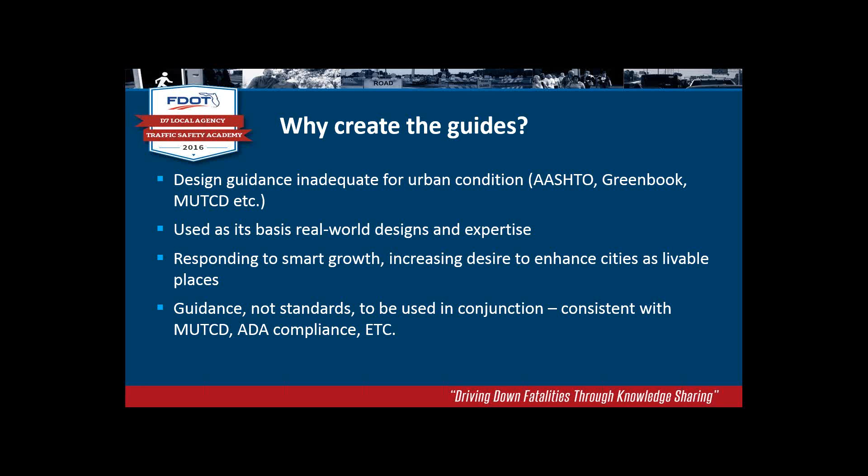They're consistent with MUTCD in most cases, ADA compliance, etc. Members span the whole country. There's also affiliate members and international members, really active everywhere from Vancouver to Miami, so you'll see influence from all over. They do workshops annually—I think the last one was in Seattle, and they held one in Phoenix. Those are really on-the-ground opportunities to look at how to apply some of these tenets.

So where does DOT stand? In 2011, it was sort of like, whoa, this guy's kind of out there, and I think they've come a long way. In 2013, there was a memorandum that kind of approved using these design guides in addition to using the AASHTO green book and the AASHTO bike guide.

Those were the two initially, and FHWA came out in support of a more flexible approach to bike and ped facility design, which is really moving things forward. That same memorandum affirmed them as primary national resources. So again, it wasn't an or, it's an and—you can use these resources by all means. They don't take precedence, but they can be used in conjunction.

In 2014, the Street Design Guide came out, and they basically said the same thing, that these are good resources to use in conjunction with other resources out there. The Urban Street Design Guide is actually listed in the FAST Act as appropriate for design. I was looking at the PPM Chapter 8 for FDOT yesterday, and they reference the Urban Street Design Guide as well as the Bikeway Design Guide too. So these are legit guides. They hadn't really been before—there was a lot of fighting about it, but they've come into the mainstream now and can be used for guidance.

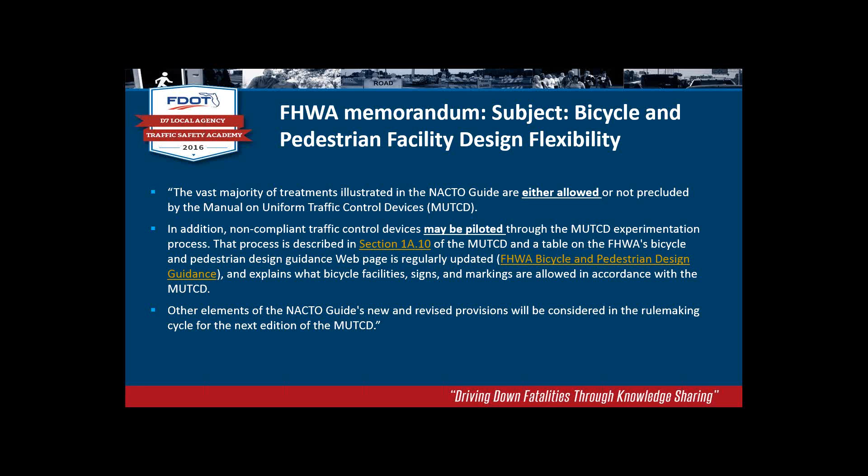To further that point, at the time, because they were kind of out there, NACTO made a point of saying that everything is either allowed by the MUTCD or at least not precluded—things like bike signal heads by experimentation are allowed. They weren't doing anything totally radical, just putting it together in a new package. And it turns out updates to the MUTCD will take NACTO into account. One issue NACTO had with MUTCD before was the length of time it takes to update and get new ideas out there. Well, now it turns out MUTCD will piggyback on the work that's been done.

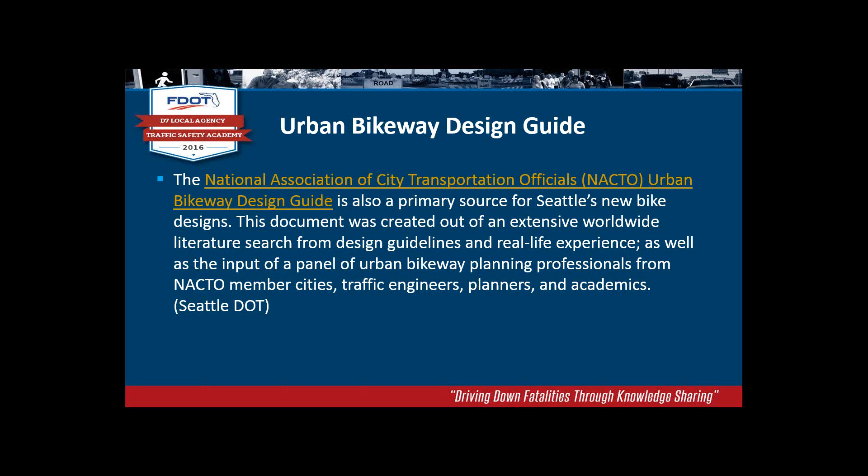So Seattle went full bore using the Bikeway Design Guide as their primary source. The AASHTO Bike Guide hadn't been updated in forever, so SDOT is one of a number of city transportation departments that uses these guides as their primary resource.

So what are they? They're design guides, idea generators in a lot of cases, because they pull together so much from so many places that if you're looking for creative ways to handle your streets, to make them more livable, these guides present those opportunities, those case studies, in a highly graphic manner that gives you things to think about and guidance about how to get it done.

When to use them? Street infrastructure involves complex situations, individual responses to context and engineering judgments, so these guides do not lay out the specifics necessarily. These are thinking guides. They don't assume you're going to open it up and see the answer to your street. This gives you ways to think about how to fit things in, things you might not have thought about.

Each of these guides did a tiering approach to their levels of guidance, identifying things like critical features. When I say strong consensus of absolute necessity, when they were coming up with these designs, they reviewed them with different cities, and what's critical are things that everyone they talked to or looked at these designs decided were absolutely necessary.

Recommended features may add value but may not be appropriate in every circumstance, and then there are optional features. Cities handle things in different ways - everybody is different, every street is different - so they also present options you might be able to apply in some places and not others. It's definitely not one-size-fits-all, except start with the critical and work out from there.

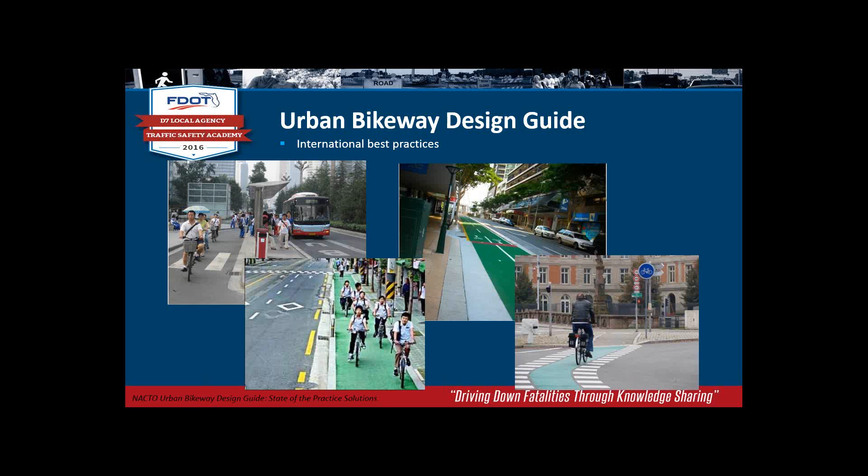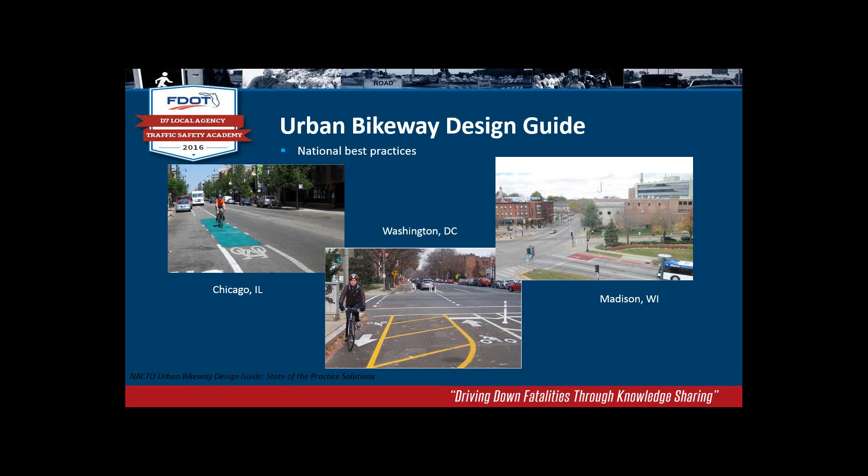I talk about how this whole thing got started. It turns out internationally there's a lot of good work going on, and the feeling was that what was going on stateside wasn't good enough. It didn't give us the street environments, the urban environments we really wanted to create. Turns out there was some national work being done too that was really good - Chicago, DC, Madison, Philadelphia, New York, pretty much everywhere were doing things that were way beyond what the AASHTO Bike Guide or the PED Guide were calling for.

So the Bikeway Design Guide covers 5 topics: primarily bike lanes, cycle tracks, intersections, signals, signs and markings - I'm not going to go through all of them. Again, I highly recommend you just open up your browser and pop through each of these. I'm going to show you how the books look, how they break down, and why they're pretty groundbreaking as far as the resource goes.

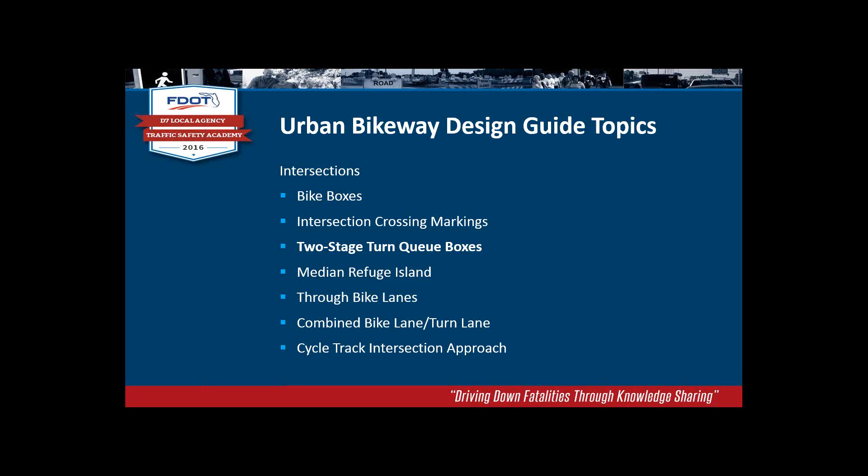Within that intersection section: bike boxes, crossing markings, two-stage queue boxes, median refuge islands, through bike lanes, combined bike turn lanes, and cycle track intersection approaches. They've thought through every aspect of intersection design as it relates to bikeway design. Every section starts with an introduction - what it is, how to use it, a reference to perhaps international best practice, and then conflicts, things to think about.

Where the guides get maybe a little more helpful than some of the existing guides, like the AASHTO guides, there's benefits to thinking about why you'd ever want to put this in. In this case, the two-stage queue box is about visibility and comfort, and then where to apply. Typical applications show up in each of those sections I talked about before, so you know when to think about using it if you didn't know.

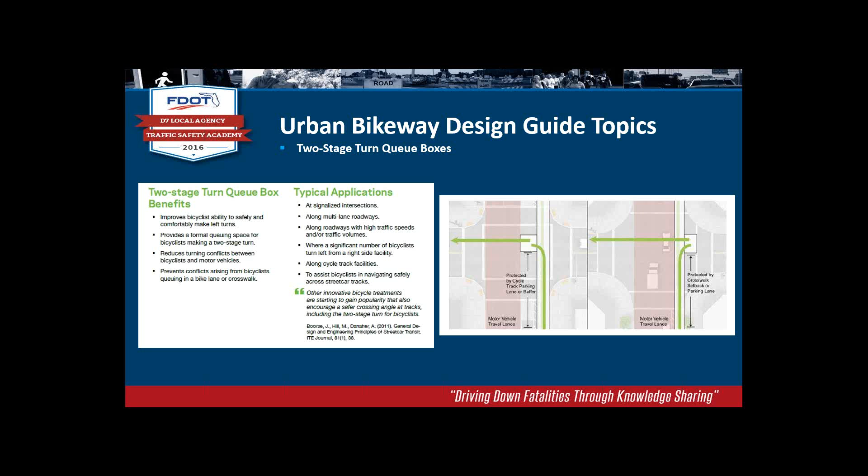On the right is a graphic, and I think these guides were on the forefront of this. It's much more mainstream now, but at the time you didn't get this kind of graphic. This shows two places where the two-stage queue box could be helpful, ahead or behind the cycle track. You get more in-depth drawings, available for all of them, and this is where you get into what the MUTCD says, placement of the queue box itself, markings across intersections. By looking at this, you get a sense of what the street would look like with it, since there are two options presented with two graphics.

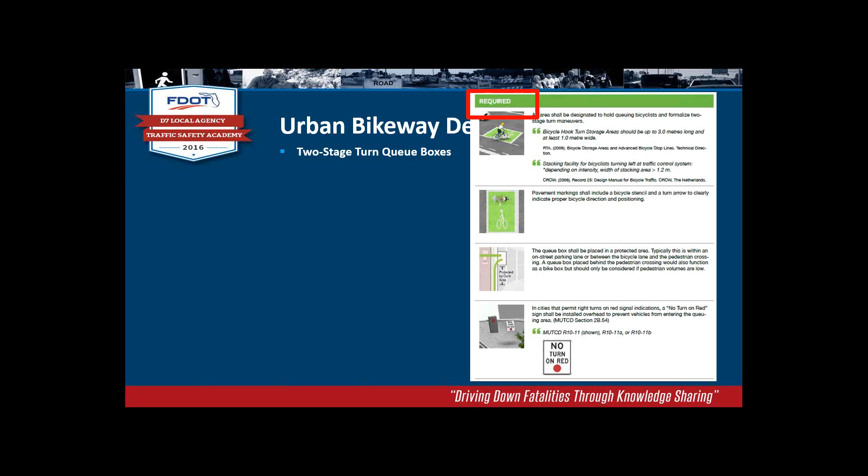They do a required and an optional section, like I mentioned. This shows up for everything, so these are the required things when you're putting in a two-stage queue box, all the way from where it is, the size of it, to the MUTCD requirements. The recommended section covers things that have been commented on and learned from other cities, and then optional things that might apply or might not. It just gives you, if you read through them all, a sense of what applies to your situation.

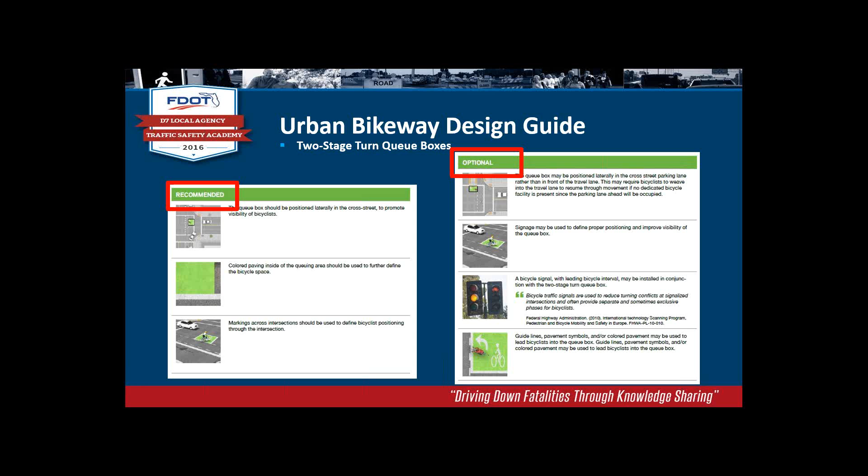They talk about maintenance, which comes up in most infrastructure design. This puts it front and center as things to think about.

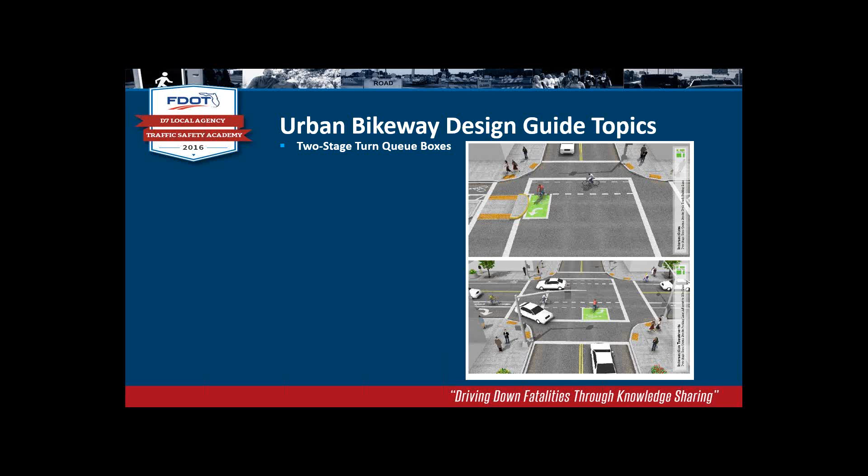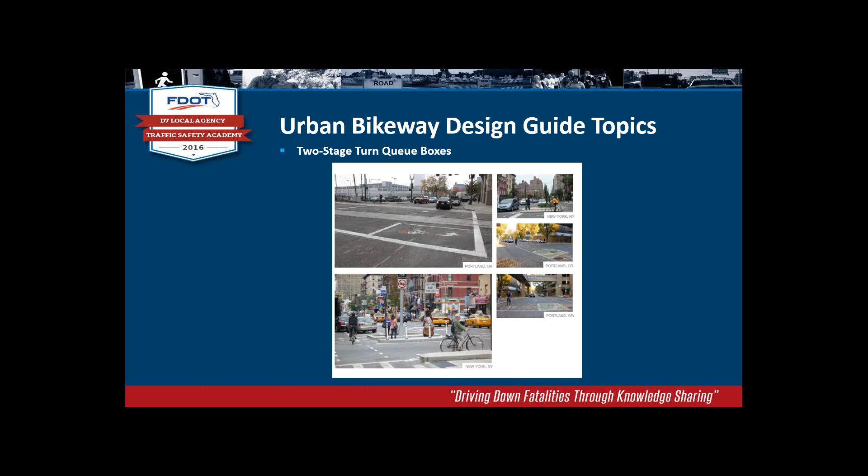And then treatment adoption and professional consensus, places that are using them. It's always really helpful to see what's on the ground, maybe make contact with folks who are doing it, and in this case it gives it a credibility. It helps you know what direction to take if you've got something specific you want to check in with them about. They're heavy on the graphics too, so this is a 3D rendering of what it would look like in practice, and then pictures, which are also helpful to see what it ends up looking like on the ground. That's the structure of all the chapters, everything from the finest points of what to think about to what it looks like in practice, so you can really understand how any of these treatments work.

They talk about bike lanes. We're seeing more and more of these. At the time it was kind of cutting edge, less so now. Buffered bike lanes are pretty standard. Contraflow, less so, but again these topics are discussed.

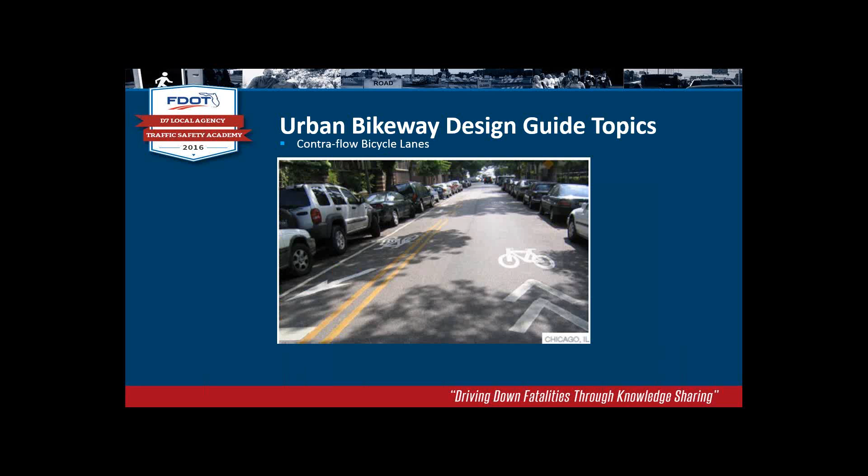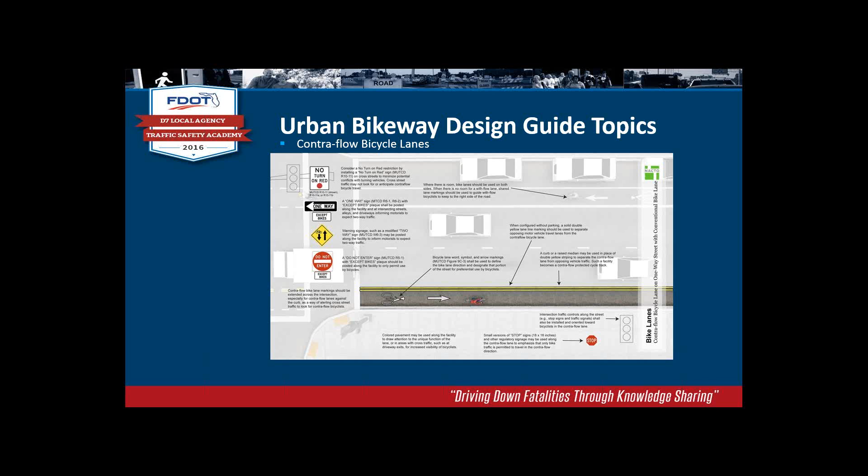I want to just tell you what's in the book, so if these apply to you, you know where to go, or at least where to start looking at this stuff. The same kinds of graphics are available, so this is that contraflow bike lane, showing which MUTCD signage to use, where to place things, issues to consider. Highly graphic-based, so if you're reading a paragraph and it's not making sense, you've got this page to show the layout and the pictures and whatnot.

Left side bike lanes are a little bit less common. In these cases there may be situations where you just don't know what to do, you want to do something, and these guides may help you figure out what's possible. They've got the same kind of graphic guidance, so if you need to explain it to someone, it's really easy to do.

Cycle tracks, of course, all the rage right now here in Tampa. We're really happy about our newest and latest one that opened, but there's a variety of them. You've got the one-way protected, you've got the raised, and you've got the two-way. All of them are applicable in different situations and have different design challenges.

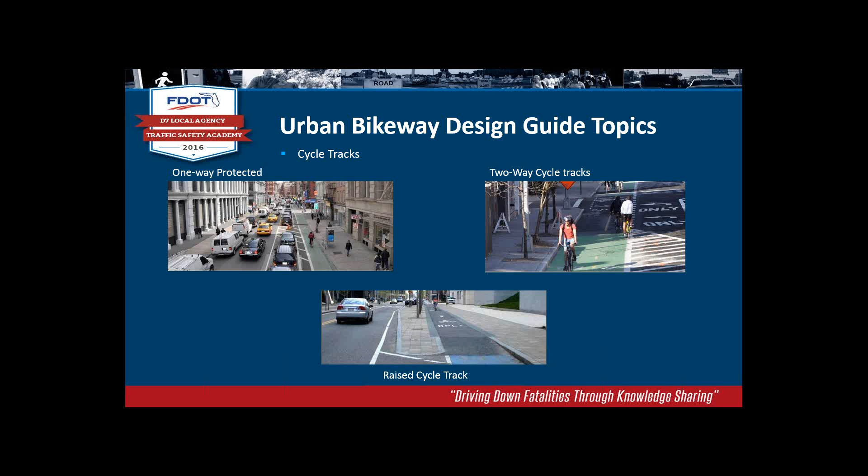At the time there really weren't many being done, and so what NACTO did, I made reference to the international focus the first time round, a lot of these treatments are on the ground in Europe and have been for a very long time. The U.S. is just a little bit behind in applying them. So when they didn't have the data to back up the why to do it here stateside, they went abroad. This is an example: some of this data on width based on intensity is based on either a European resource or a resource from the Netherlands. Again, it just gives it credibility.

It's less of an issue now because we've got a lot of U.S. data to back up the success of these, but at the time it was really what made this guide a valuable resource.

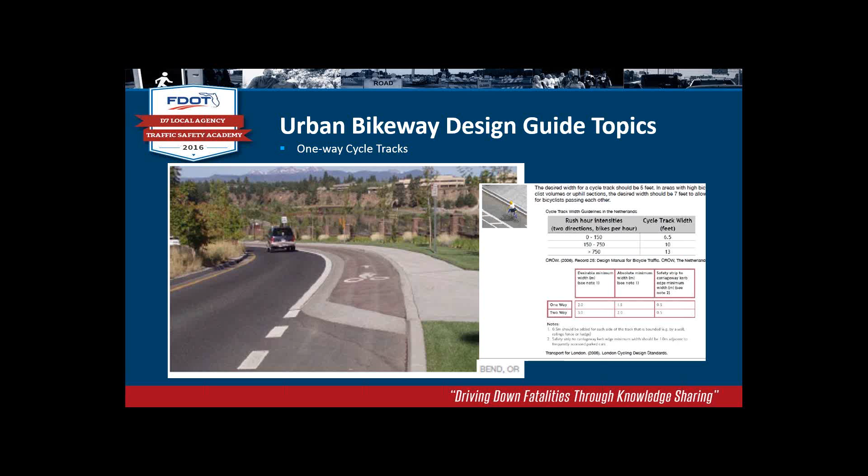And then again, more graphics, raised cycle track, and kind of where you see the conflict. They show the green paint and the signage. So if you've got this circumstance, you've got at least a start point for your design.

Two-way cycle tracks, and I know not everyone on the call is from Tampa, but you may recognize, and of course in that right picture it tells you you're in Tampa, so maybe that's cheating, but this is a cycle track that just opened recently, has been pretty successful as far as I know, and was designed using the tenets identified in the NACTO guide.

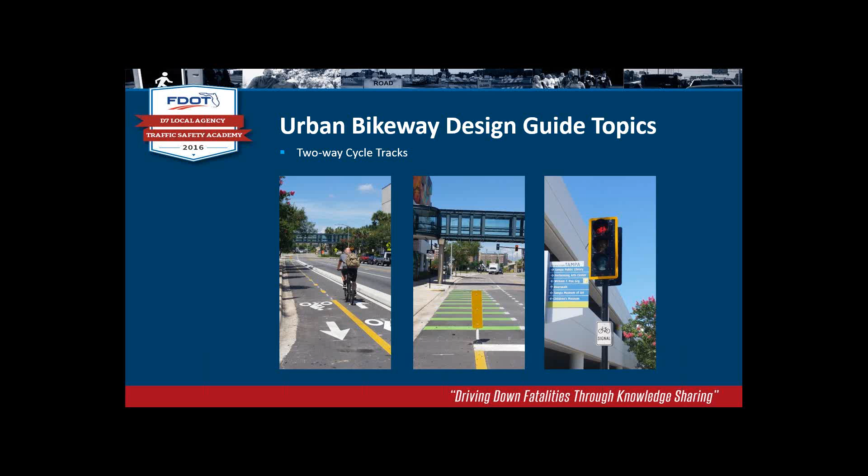The whole idea was that the NACTO guide was first, true, but also now FHWA has some guidance which I recommend folks take a look at. The separated bike lane planning and design guide put out by FHWA is pretty hardcore. It's got a lot of options, everything from when to do it, kind of the way NACTO's done, to things like the different barrier types, from paint and sticks to 3-foot cement, and kind of when those are appropriate.

Another good guide to use to supplement, and it kind of speaks to the change in design practice I think that's going on. But I know FDOT doesn't have their own design guidance yet on cycle tracks, or urban shared use paths, I guess they're being called. It's coming, but for now they're using the bikeway design guide, and then of course engineering judgment.

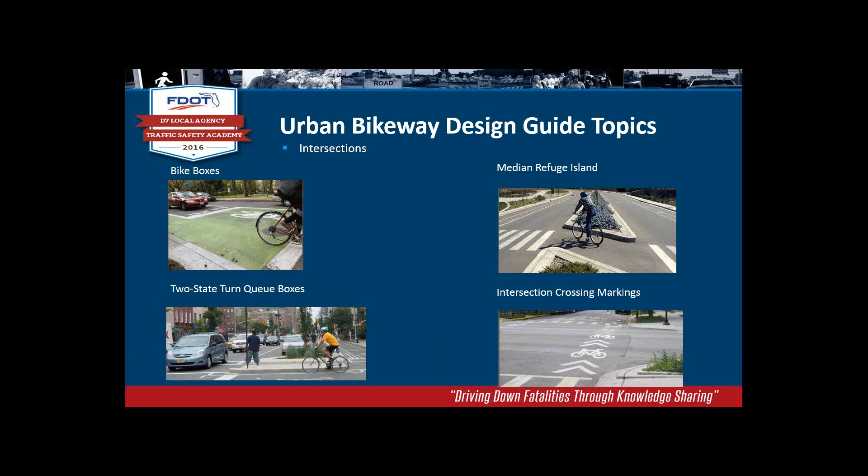Other topics include intersections, really important to all bikeway facilities. We know intersections are places that folks are really vulnerable. So in that regard, there's discussion of bike boxes, queue boxes, the median refuge islands, and the intersection crossing markings. Additionally, through bike lanes, approaches, and then combined bike lane turn lanes. So guidance on all of those is available in this chapter.

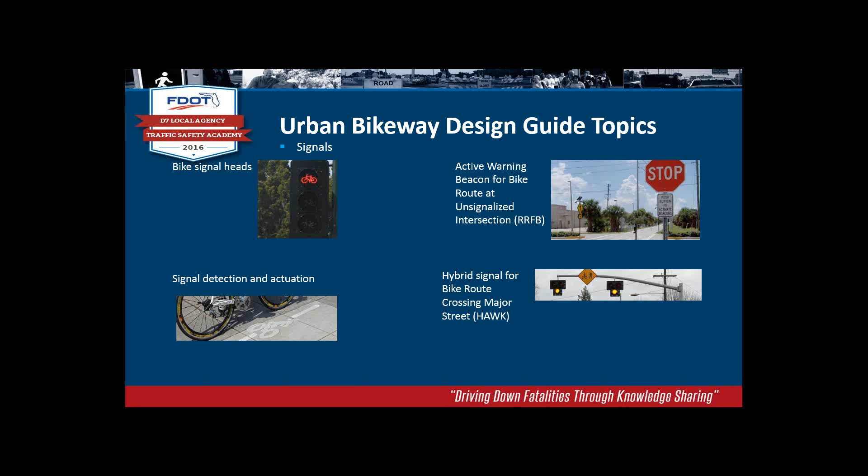They go into signals, because really it's a holistic approach, right? It's not just infrastructure. Signals are as important. Bike signal heads, signal detection and actuation, RRFB, and HAWKs are also discussed. But again, these are components of a successful bikeway system.

They developed a pretty good chapter on signs and markings, where they cover wayfinding and colored bike facilities and shared lane markings. Shared lane markings are pretty standard. We've seen some debate about the efficacy of those, and they're not obviously the preferred. We've kind of decided that the multi-use trail separated is the way to go, but sometimes shared lane is it.

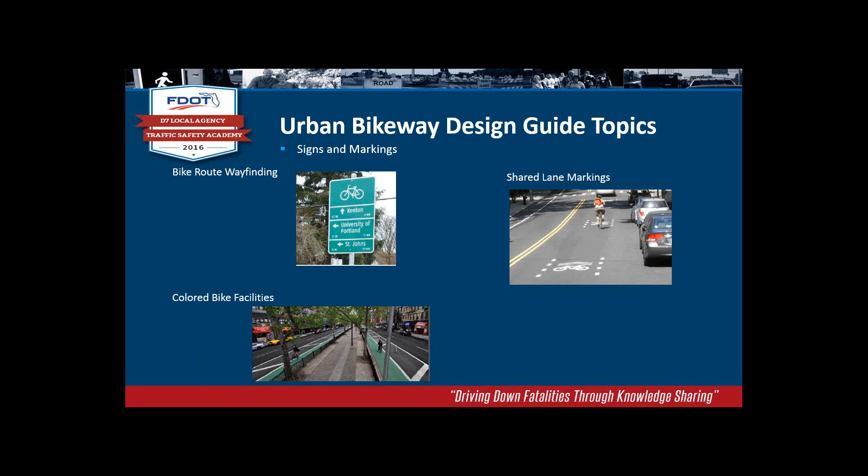They do talk about those colored bike facilities. There's a lot more of that on the ground, I think, across the country. But that bike route wayfinding is something that they spend time on, I think, because, again, it's this holistic approach to bikeway design. You can have infrastructure all well and good, but the wayfinding is what ties it together.

So they've spent some time with the idea that there are multiple kinds of wayfinding signs. This confirmation sign tells you you're on a dedicated bikeway, and it also helps motorists know what's up. Turn signs, if you've got a change of direction, and then decision signs, mark the junction, with information about destination. So, like I said, infrastructure is all well and good, but if it's not tied together with information, then you're kind of stuck as a cyclist. The idea that they've spent as much time as they have in the book on it highlights that importance.

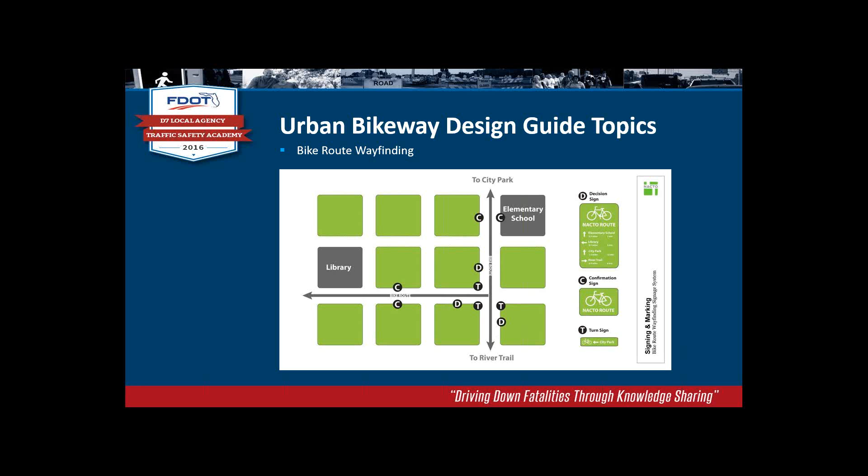And as far as if you're designing a system, they lay out when you'd use the types of signs. So if you're putting together a strategy for wayfinding, this is a good place to start. There's plenty of other resources and plans out there, but if you're looking for how to think about putting together a wayfinding strategy, this hierarchy makes a lot of sense.

And then the last thing about this guide that I think is really good is the resources. Like I said, again, it was pretty new in '11. There was a lot of pushback about it, but what they did do was compile a list of resources, city resources from the NACTO members, design guides, so you could back up what you're looking at, and international resources, so you could see how these things worked under other circumstances.

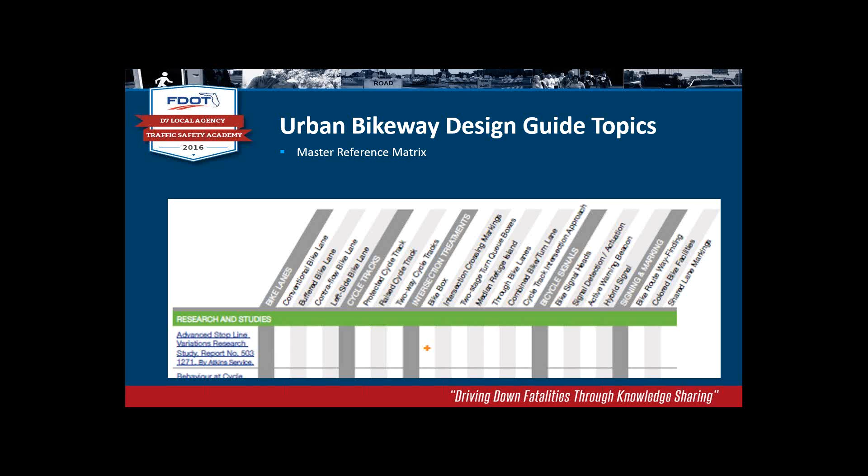So their master reference matrix covers the stuff that they're talking about, everything from bike lane to signing and marking, and then who's using it and the ways they're using it. There are links to pages and things to continue to allow you to further educate yourself about it, these resources and stuff, these facility types and these tools. So, if you're just learning about it, this is a great way to get the guide for some ideas and then further the research looking at case studies and examples on the ground.

Okay, so that's guide one. Next one I want to talk about is the Urban Street Design Guide.

Same group obviously put it together, kind of that same really graphic interface, and the idea being taking the streets back that we haven't been designing them with livability in mind. That streets are not, or should not, just be about moving cars. It's about livability and urban spaces.

So to that end, they cover streets, street design elements, interim design strategies, intersections, those design elements that make intersections workable, design controls, and then resources. One thing they do in these guides is really set up each chapter based on principles, and I think understanding where they start their conversation helps set the context for any discussion.

So basically, street design to NACTO is a variety of things. Streets are public spaces, and we've not been doing a really good job with that. They're great for business, and they shouldn't be about moving cars through as quickly as possible - it should be about sticking around, and that they're changeable. While these projects are big, they can be changed, and I think that's a pretty monumental idea for a lot of communities. Design for safety.

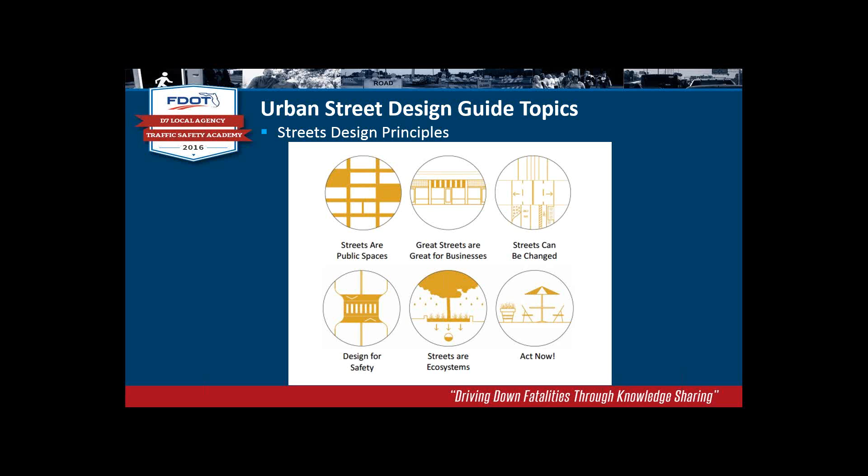So these are the principles in which they set up their topics, kind of help set the stage. You get the feeling it's about livability and really changing the paradigm. They set it up with each street having three phases: existing, so what it's like out there right now - typically that will help you figure out what it is we need to change.

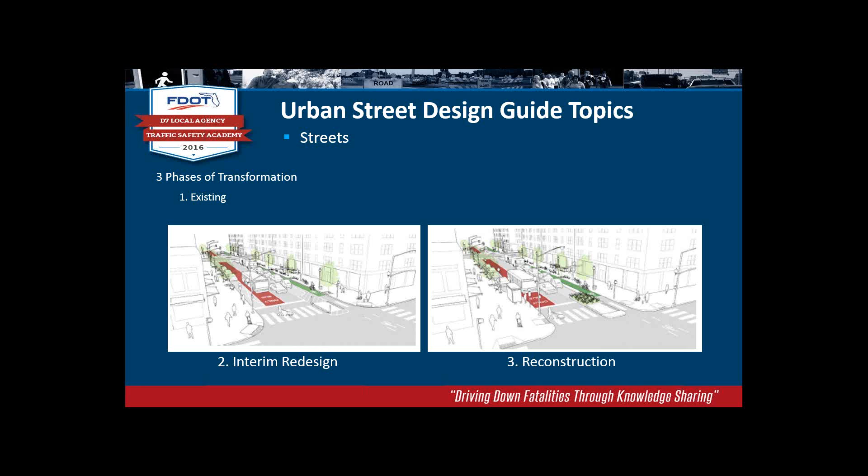They're really big on interim redesign and then reconstruction - this idea that you can do stuff in between and make good changes even before you get to a full reconstruction, which may be super expensive and something that is years down the road.

They talk about context, and it's one of those things that makes a big difference. If you respond to the context, then it gives you an idea of what you should do, if you understand where you're starting. It just gives you an idea of what you can get done.

A bus-only lane - basically shrink the street and make it much more manageable. Adding a raised cycle track or parking-buffered cycle track, again to narrow the lane and slow the traffic. And considering widening sidewalks - if you've got a full reconstruction, it's a pretty expensive thing to do, but if you've got the chance and you want to make changes, these are some things that can be done to turn a one-way street into something that is lower speed and more accessible to everybody.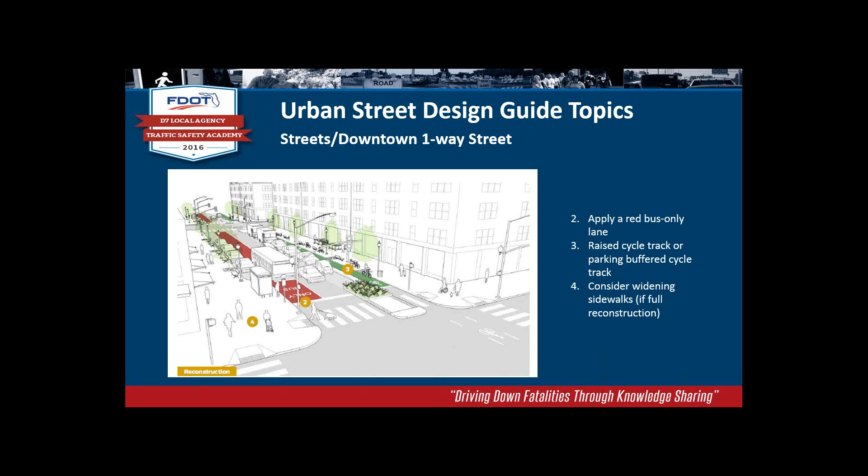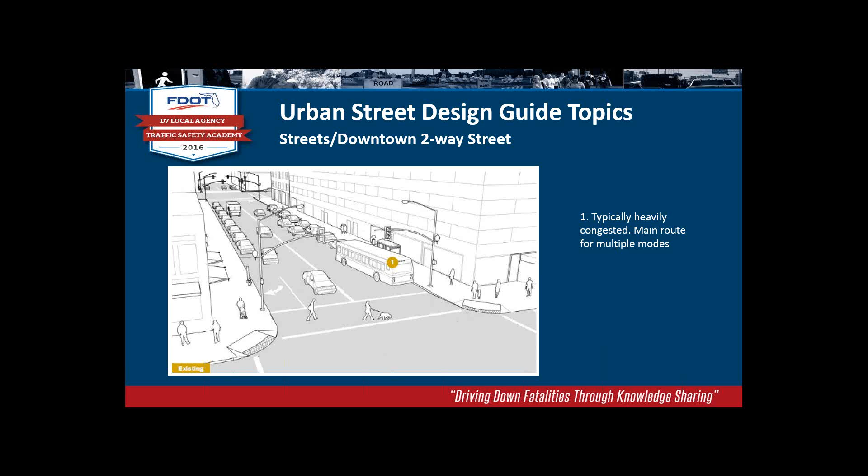That same approach on the downtown two-way street - it's typically heavily congested, a main route for multiple modes, and the source of a ton of conflict. So things that you can do to make it better, safer, and easier to move around: bus bulbs - some of these things are pretty simple - raised cycle tracks, again narrowing that street space.

Of course, if you add that cycle track, you've got to pay attention at intersections, and that's a whole other discussion. One thing to think about when you're modifying downtown streets is freight. You've got all these different modes and users, and managing that to make sure they're still able to do what they need to do.

It's a balancing act. Maybe managing freight is about off-peak delivery or delivery during certain times, that kind of thing. But it's a holistic approach. It's not looking at how to move cars, it's really looking at how everyone can use the street.

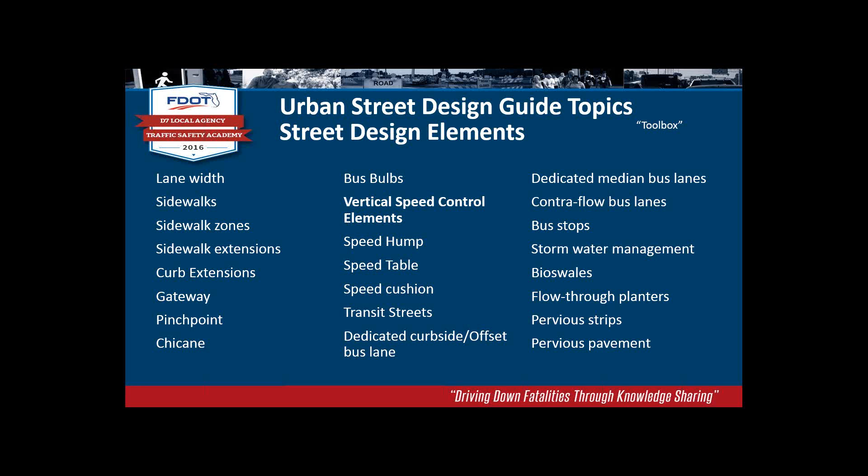They offer a lot of these elements, and if you use some, use all—well, probably not all—but you can use any number of them in concert. Consider this like a toolbox. Some may apply, some won't. I'm going to go through a few of them.

For example, they talk about a gateway, and often that's a major-to-minor street thing. It can be used to slow traffic speeds down if you go from a major street to a minor street.

They give specifics, things like the length of curb extension should be equal to the width of the crosswalk. So you get into some of those design details, but also just kind of general commentary about it.

Because they look at streets holistically, number 2 is about stormwater management features. It's really important that water doesn't just drain into the storm drain system, overload it, and get forgotten. This is an opportunity to even apply better management practices for that.

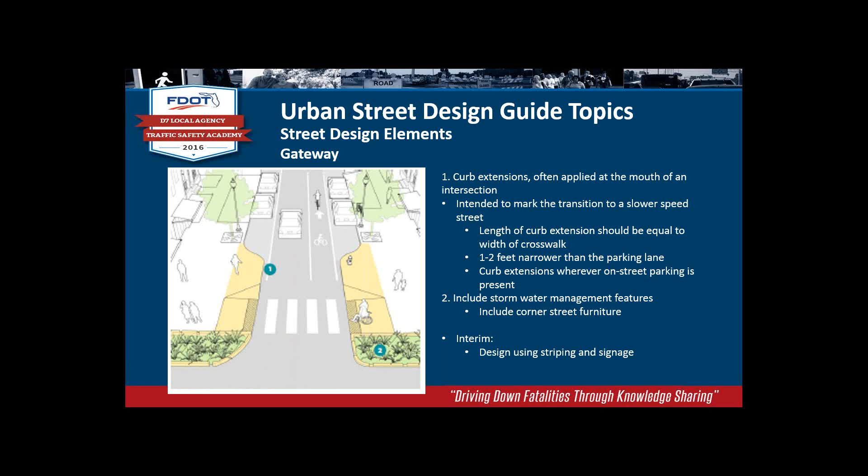And if you can't build out two curbs, because it's a really expensive proposition, your interim option may be striping and signage. There are things you can do, even in the short term, to set up sort of the gateway principle and really change the feel of the street.

Again, there's a number of elements I saw on that first slide, but this example is just vertical speed control. It comes in a variety of options.

These are pretty well known, but one thing the guide does do, and I think it's important—again it goes back to that holistic approach—is the importance of coordinating with emergency services when you're doing something like this. They've got big trucks, and it impacts them if they're on speed humps, or maybe speed pillows are better. Working in partnership with your emergency departments when you do something like this helps manage the impact for them. So consider them partners in the process.

So maybe if you've got an emergency route—more often than not—maybe you use, like I said, the speed pillows and not the whole speed hump. Letting them understand the impact of these on their response times, and then maybe even testing it out before it goes permanent and reporting back, understanding if it's too much of a big deal. You've got to come up with a different option, then make it permanent if appropriate, or modify the design so it ends up working for whatever your goal is, as well as for your emergency service folks.

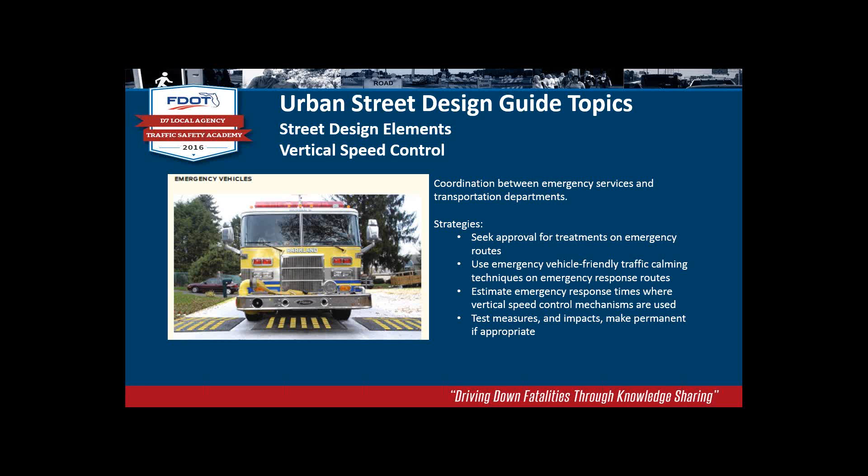Transit streets. So one of the street design elements—they have a whole chapter on transit streets. This idea that it's a certain type of street, but it incorporates a little bit of everything. You're supporting passengers every step of the way, walking to and from your transit. It may have dedicated lanes, may have signal timing, and also talks about including transit stops as elements of the streetscape, not an afterthought. Really integrating every aspect of transit into your street design, so it's not just an add-on. I think that's some of the issue that's going on.

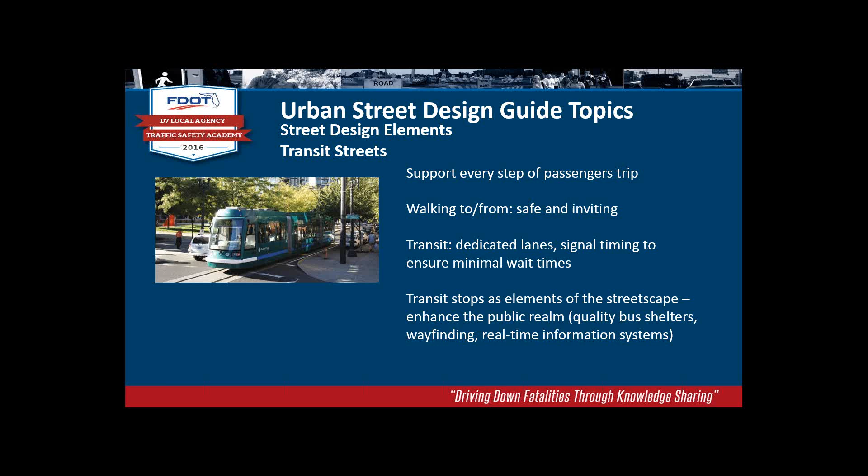So enhancing the public realm with transit rather than what we sometimes get on our streets. For transit streets, they talk about different things: dedicated curbside offset transit lanes, median bus lanes, contraflow bus lanes, and far-side bus stops. I'm not going to go into them so much—this is just to say, if you've got questions about some of these specific things, this guide is a good resource. And the Transit Street Design Guide goes into that even more, and I'll talk about that in a little bit.

This whole holistic street thing, it's not just about cars. They get into stormwater management, and it's more and more of an issue. If you can't handle runoff, it affects your design. And so by incorporating stormwater management practices that process it on site, you're not adding to the burden on municipal waste systems.

You make rainfall an asset rather than something that's got to be removed, and it really does respond better to the environment. One thing that's pointed out in the guide is this is a complicating factor. You're not just building concrete and pouring water into the storm drain system. There may be maintenance agreements and things like that.

So it's important to get the right folks in on the discussion at the point of design. And then making sure we respond to the site. Again, this isn't just flat concrete. We've got soil to contend with, native plants, site slopes, that kind of thing. So really just designing with the site in mind.

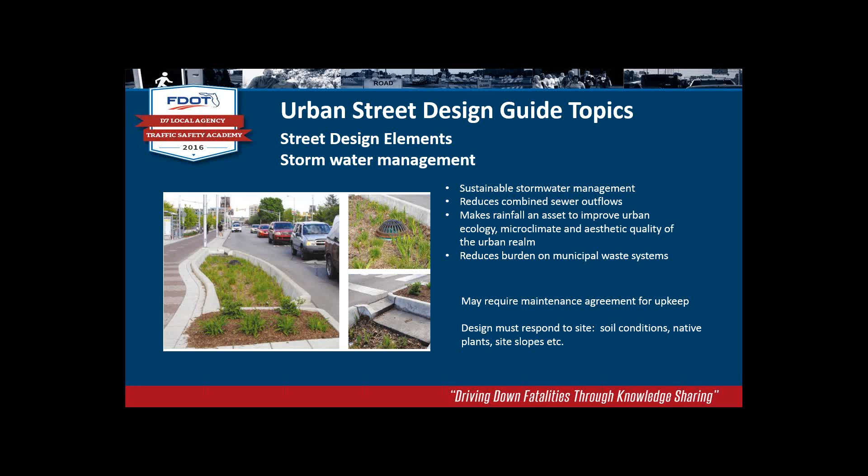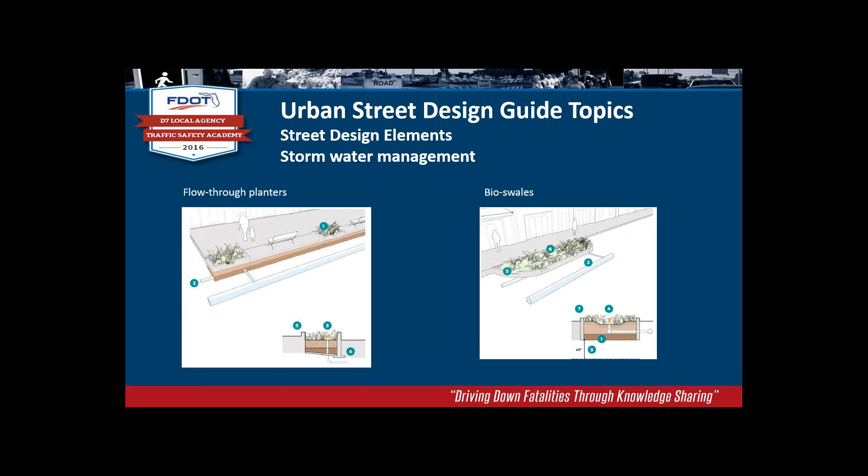They offer different options: flow through planters, which get you into the storm drain system, bioswales, which process them on site a little bit and then flow out, pervious strips, which do a little bit more of that, and then pervious pavement. So a number of different options, ways to handle your stormwater design, your stormwater management.

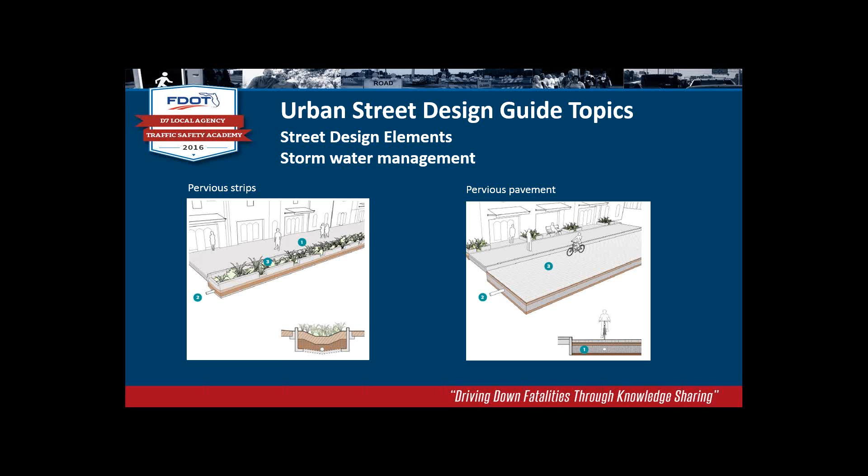One thing NACTO really pushes or encourages is these interim design strategies. To go from 0 to 60 is too much. So there's plenty of things you can do moving incrementally through the process to allow people to get comfortable with what may end up being major changes, but you do it in small pieces. So: move the curb from pilot to permanent, parklets, temporary street closures, and interim public plazas, all things that give people a way to experience the change without committing to it necessarily.

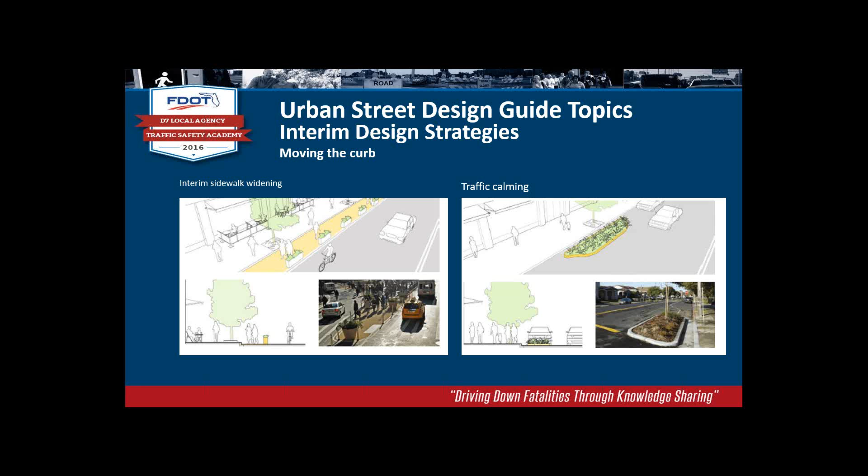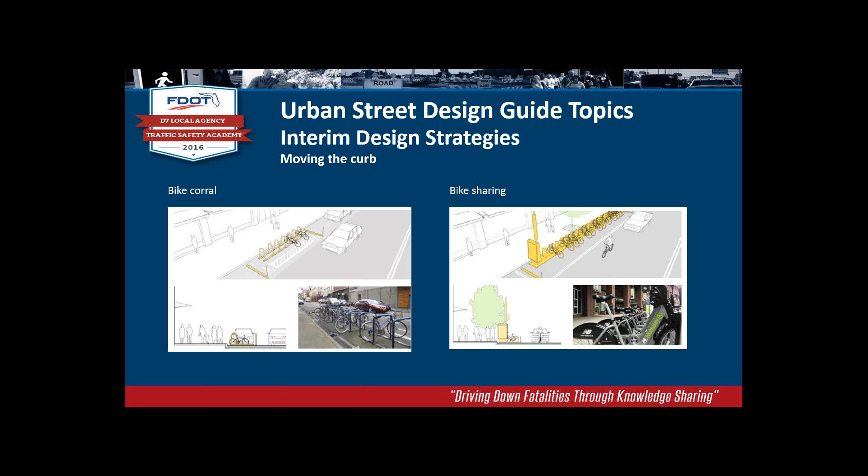To pour the concrete. Traffic calming, the concrete islands that change traffic flow and give pedestrians a little more room. You're not pouring a whole new sidewalk, but you're adding those islands and things. Bike corral is a great way to move that curb. You're taking a parking space, but you're moving the curb out a little bit. Bike sharing is another one. You use that space on the roadway for bike sharing. Again, short of moving the curb, this is a way to change the dynamic of the street.

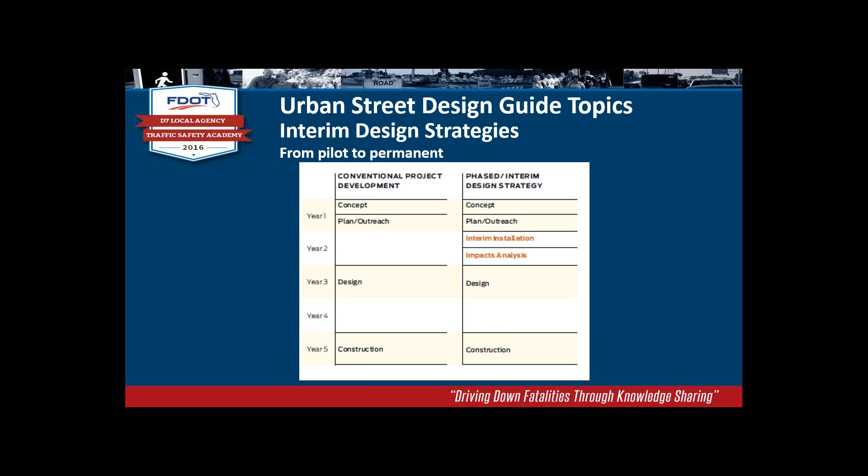One thing, like I said, this whole idea of interim installation and analysis, one thing that I know New York City DOT did and has done with a number of their plaza projects, with Times Square, things like that: try it, test it, and also then analyze, do a before and after. And what that does is give you feedback and may help you improve the design before it gets to construction. Maybe saving you from mistakes, probably making design better than what you would have done had you gone from concept to construction. So this idea that you pilot projects lets people get used to it, maybe lets you get it done if you don't have the funding to do it full out, things like that. So lots of good reasons to try it if you can get your different agencies on board.

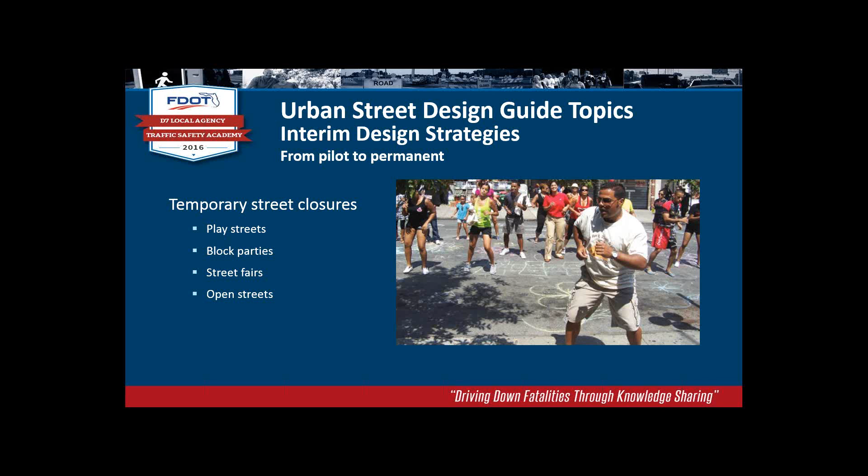Temporary street closures, another way to get folks used to the idea that streets are for more than just cars. So play streets, block parties, street fairs, open streets. These ideas are more and more common, but at the time they were pretty new.

This is about interim public plazas. This idea that you can take space that's not being used and turn it into a plaza. Often there's a safety need you're responding to. It may just be that the street segment's underutilized, and it's just an opportunity to mix things up, to integrate it better. You may want slow traffic speeds, that kind of thing. So look for these opportunities in your community, and they can make a big difference.

And, you know, because it's interim, we're talking low-cost materials. You do have to be ADA compliant, and there's a public awareness marketing piece, but sometimes that takes off on its own. And one lesson learned in some places is movable furniture. You're not committing to where a bench is, but you can put out table and chairs and an umbrella and really make a difference.

They offer intersection design principles, and this is the context in which they do their design elements. So intersections should be as compact as possible. Think about them as part of a network and not in isolation, which is true - if you're impacting one, you're impacting another. Integrating space and time, so signals have to work with the intersection.

This idea that it's shared space for all users is evolving. It's definitely not something that we're doing 100%, but this idea that we really need to think through everyone using these spaces.

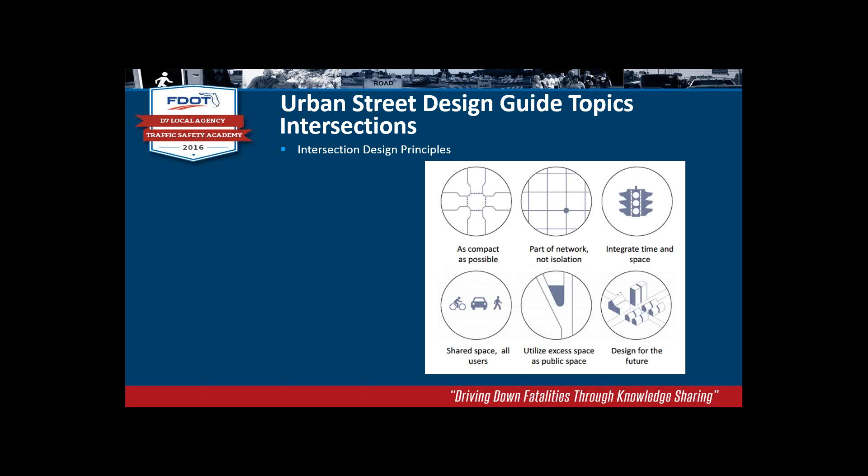Often intersections are things that have not been rethought from the ground up - they've just been added to. So this is a chance to maybe rethink your intersection and use it as public space, and then design for the future and take into account land use and changing population and stuff.

They hit intersections from a number of angles, major intersections to roundabouts to complex intersections. They offer a way to analyze intersections and also then intersection redesign. If you've got an intersection in mind, this guide is probably a good place to start for things to think about. It might not be the be-all, end-all, but it certainly gives a lot of information and a lot of case studies, which are helpful too.

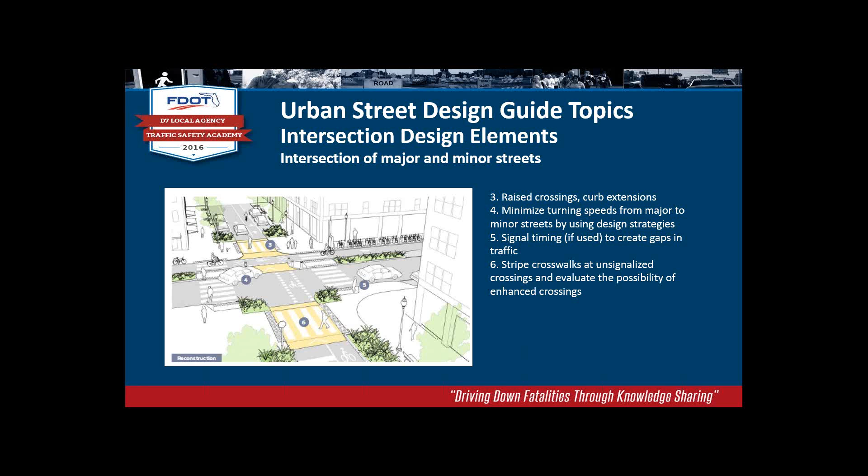You want to minimize those turn speeds from major to minor. That differential is something that would have to be managed using design strategies to help do that. Those tight radii are one thing to think about. Signal timing to create gaps to let pedestrians cross - you might need to adjust that to really make the intersection work. And striping crosswalks at unsignalized intersections, just from a safety aspect, would be something to consider if you're doing that major to minor intersection reconstruction.

They do offer ways to analyze intersections if you want to begin to make change, but don't have a methodology in mind. Keeping in mind that intersections can be public space - maybe it's time to think about an intersection in a community as more than just that place to move cars. You can make it safer, you can simplify it. Often simplification will reduce crashes, improve visibilities, and reduce signal delays.

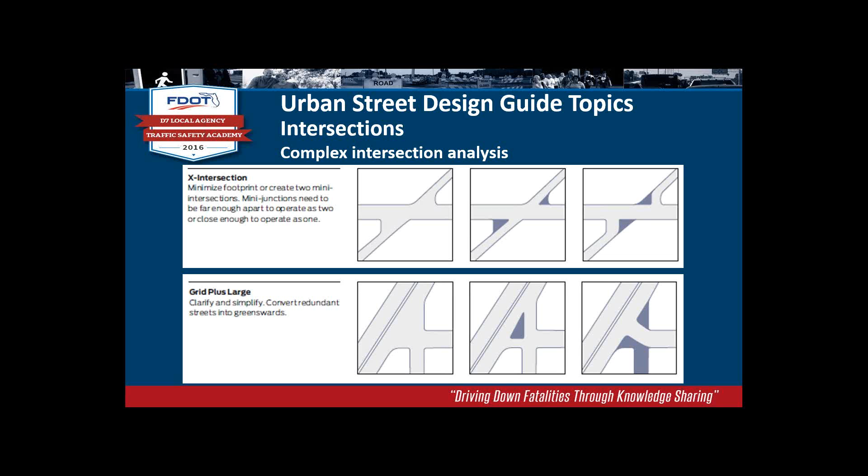They show a number of different types of intersections, and these are all examples of intersections around the country, and ways they've been redesigned to make them simpler and to get some public space out of them. This is only 2 - I think there's about 8 or 9 listed, but it's interesting to see the different ways these intersections have been redesigned to become something else.

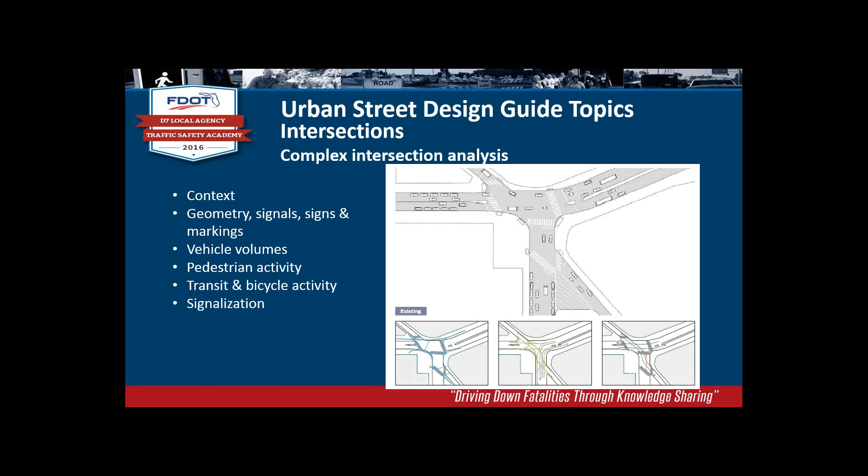When you do that analysis, consider context, geometry, vehicle volumes, but also pedestrian activity - where are they, how are they moving, are they moving in less organized ways, how to manage that - bike and transit activity, and also signalization. So a top to bottom review of intersections to come up with the best possible design.

And then design controls - big into that math behind what you're doing. So design speed, speed reduction, design hour, year, performance measures, and then functional classification. And if you haven't already guessed, they're not keen on, in particular, that last one.

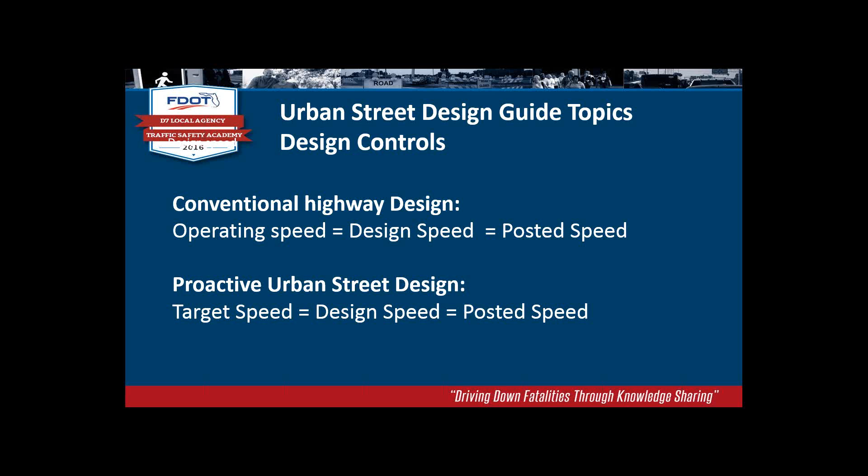So the premise of their design control discussion is that conventional highway design gives you this idea that operating speed equals design speed equals posted speed. If you're being proactive and you're doing urban street design in the way that the cities want it done, you design for your target - it's not the other way around. And there's different ways to approach it to help that happen.

So when you design for that target, we're talking 85th percentile of the observed target speed should be between 10 and 30 miles per hour on most urban streets. That is, when I think about Tampa in particular, that's pretty monumental.

Your target speed by type of street - so if you've got your arterial at 35, you've got your collector local at 30, and your shared alley streets at 5, 10 - your design speed should be at or below your target speed of the street.

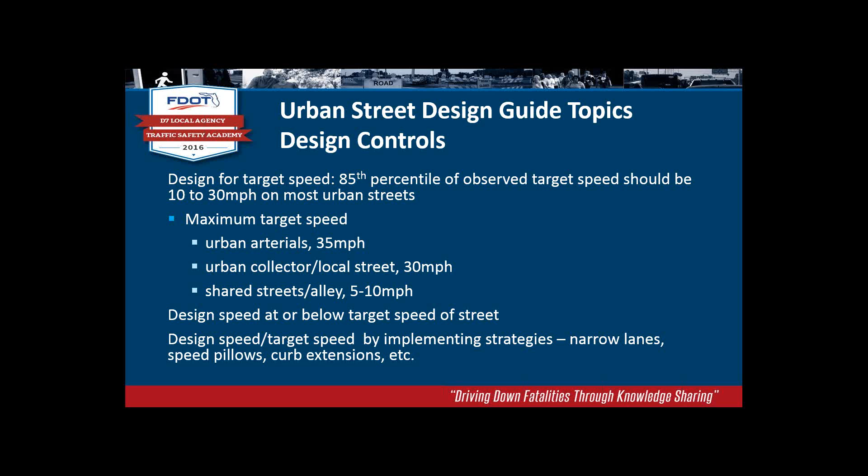This is really about slowing the cars down, working that livability angle, really giving people - I want to use context sensitive - giving them the cues to drive slow, not because the speed limit sign says they drive slow, but because of the way the street's designed. It's really a paradigm shift, and that's part of what these guides are trying to encourage.

We design with a vehicle in mind, and basically they flip it a little bit and say it's your frequent user that should dictate what you're doing, and you should be able to accommodate others. But this idea that you can do it for everybody might be a little far-reaching, that everyone's equal. That's not to say we should discount freight. There are plenty of ways to design intersections to account for larger vehicles, but we're over-designing if it's primarily a pedestrian use and we're designing the radii into it, that kind of thing.

So for truck routes, I would say it's in coordination with the different routes, figuring out which one is perhaps the emphasis, that kind of thing. But the guide gives insight into how to apply those design controls and how to manage all of these different users.

This idea of design hour is really important, so it's more than just ADT, and they really stress looking at each mode. This graphic is about what a day in the life of the street is, and just looking at cars doesn't give you the full picture. If you look at what's going on at 1, it's high pedestrian volume. At 8, it's rush hour, and in the evening it's a little of both. So how do you design for that? Their point is that the measures we're using don't take into account everything that goes on the street.

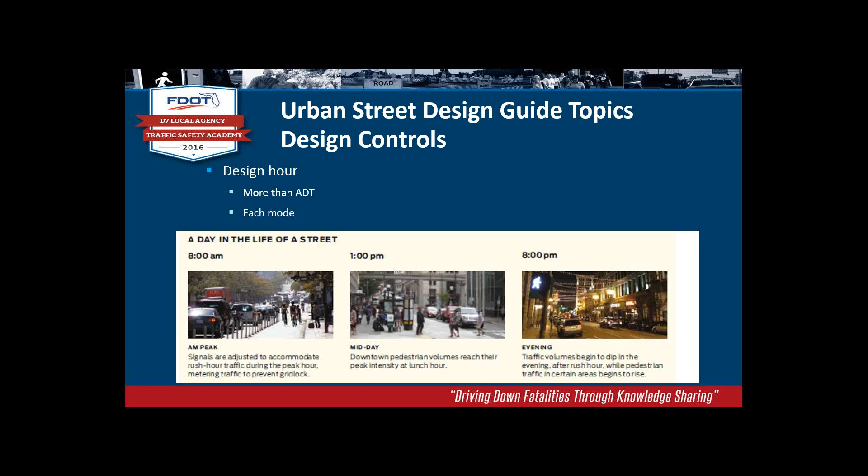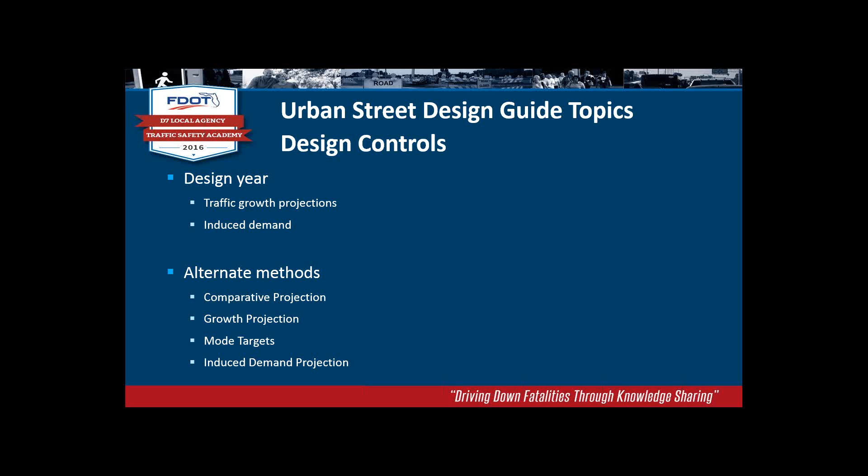They go into why traffic growth projections are perhaps not applicable, and induced demand—the idea that we've got projections that aren't appropriate and shouldn't be used. So they suggest a few other methods that might make more sense if you're looking at how to justify design changes. I'd recommend reviewing the guide to see what the pros and cons are, and what some of these alternative methods are.

Like I said, they are really not keen on functional classification. The guide says it's limiting, and that makes sense when you think about it in this context. They really stress that street design needs to reflect community and community needs, and those needs go far beyond just moving cars.

Because performance measures are really important now—I don't know that they were emphasized in the book relative to that, since these books are a bit older now—but it's important to point out that when they talk about performance measures, they're talking about them for all modes, so different ways to measure performance. Pedestrian, for example, active storefronts and human scale design, very different from level of service. Bike level of service and ped level of service are primary indicators or claimed primary indicators, and according to NACTO, that's not the case.

I think if you go to places that have active streets, you see it's not just a matter of pedestrians per square foot, that kind of thing.

For bicycles, they suggest considering direct access and safety. Cyclists don't want to go out of the way any more than motor vehicles do, so why should we make them? So direct access to destinations and safety—that's crash data—and comfort too. For vehicles, we're looking at delay, so that's the signal timing idea.

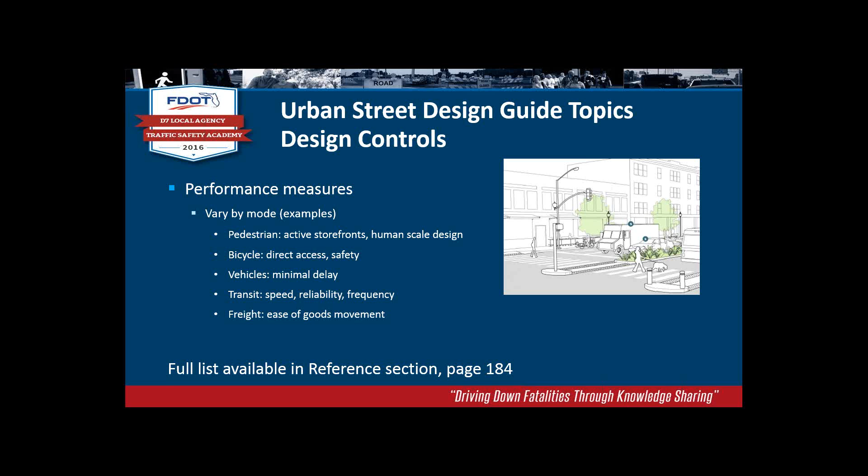On page 184 of the Urban Street Design Guide is a full list of performance measures. It's an interesting exercise to take a look and see how differently your street pencils out if you take into account these different measures, or if you apply them.

And last but not least, my transit street design guide. I have to admit right off the bat that this one is the newest one out there. I'll tell you, I'm an avid, maybe rabid sometimes, cyclist person, so this one is newer and one I'm slightly less familiar with. So I'm going to take you through it as best I can.

It's also got a ton of detail, so I'm going to hit the different topics and some of the graphics. But if you're looking for ways to rethink your transit system, this is a great place to start. There are other guides out there, but this one is the newest. There's a couple of good webinars on it too, so if you want more information, by all means check those out. I think NACTO has a couple even.

So what does the Transit Street Design Guide cover? Everything from transit streets to strategies. You're looking at top to bottom, micro and macro elements of your transit system. Again, it's this idea that it's holistic. You can't just think about your Route 14. You've got to think about your whole route, how it impacts, how it connects, how it doesn't, what delays, that kind of thing. The guide hits transit stops and stations, those elements of stops and stations, transit lanes and transit ways, intersections, which are key to any system functioning, and strategies and resources, which are invaluable.

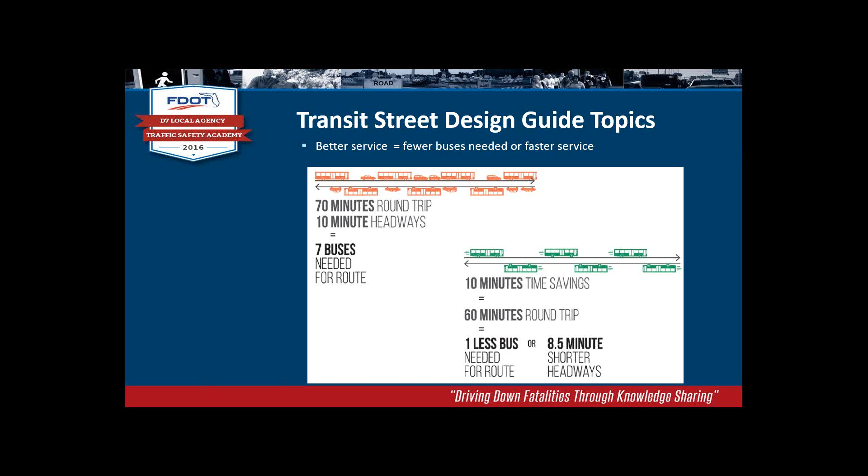Again, those are the topics we'll talk about. The principles for transit streets: they're living streets. You've got to prioritize at every scale - you can't just be looking at rapid routes, you've got to look at local too. You're designing for growth - this isn't a short-term investment.

It's active - you've got to take into account the whole thing. Design changes demand; you will likely have more demand as you improve your designs, and that's important. Near-term projects, long-term projects or plans - you can implement in pieces, in parts, to get to your long-term vision.

So they define the context, much like the Bikeway guide did. Providing service at all scales is critical, but there's different things to think about for each scale. At neighborhood scale, you may have all-week demand and ridership, but it's hard to manage reliability if it's residential based. If you're in a corridor, you want to prioritize transit throughput and pedestrian safety, both of which can support higher transit capacity. If you're on downtown streets, you've got shared space, which is a whole other host of challenges, and that may make separation of transit from traffic necessary.

Some of those opportunities will vary too. At neighborhood scale, it's boarding bulbs, curbside management. At corridor scale, maybe it's an opportunity to assign a travel lane to transit. Downtown, maybe it's congested enough that you need exclusive transit ways, signal progression, all-door boarding, things like that. So the idea is you want these solutions to match the context.

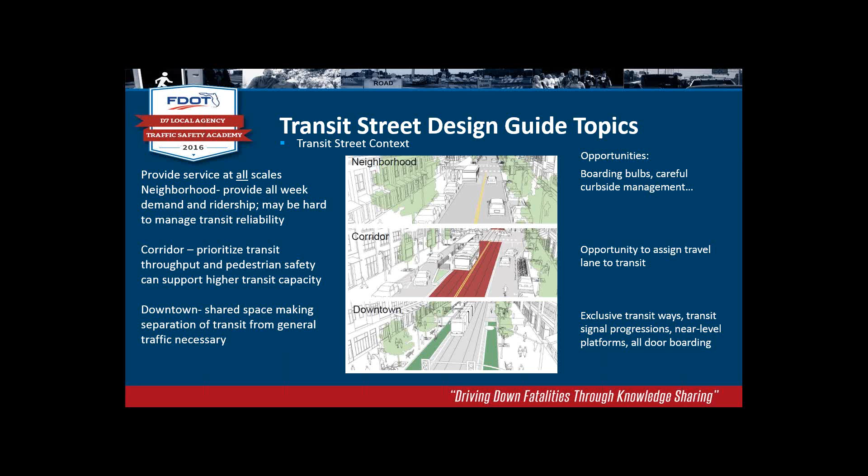Because I'm partial to bike stuff, I've picked a couple of designs that incorporate bike lanes. Like I said, there's plenty, that list was really extensive. I didn't want to go into all of them, so for the sake of not hearing me drone on for 3 hours, we'll pick a couple.

So, neighborhood street with bike lanes, more and more common, but things to think about is conversion of a stop to an in-lane stop. They really stress the fact that transit shouldn't have to pull out of traffic flow to stop and pick up folks. Maybe we're doing transit a disservice by making cars priority ahead of transit. That delay drivers feel is not worth the delay to transit, it really does mess with the functioning of the system. So there's things you can do to make your inline stop more efficient, and those should be done, but really keeping buses in lane.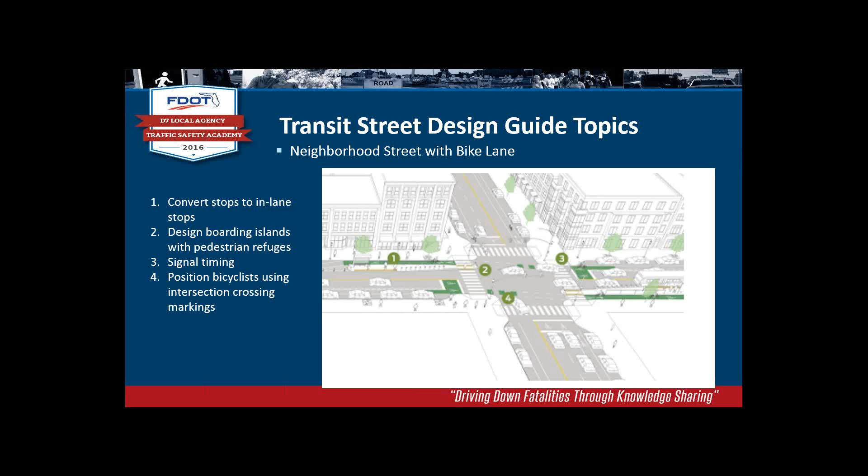Another example is a one-way transit corridor. They talk about placing transit and bike lanes on opposite sides of the street to minimize the conflict. We see a lot of bike adjacent to transit, but maybe sometimes it's better to separate the two movements and minimize those conflicts when you can.

Number 2 is consider turning movement restrictions to minimize auto-transit conflicts, restricting one or the other and just moving the movement down, but really looking at what makes sense for efficiency's sake. And then managing curbside loading, again, is in-lane or boarding islands or any number of things.

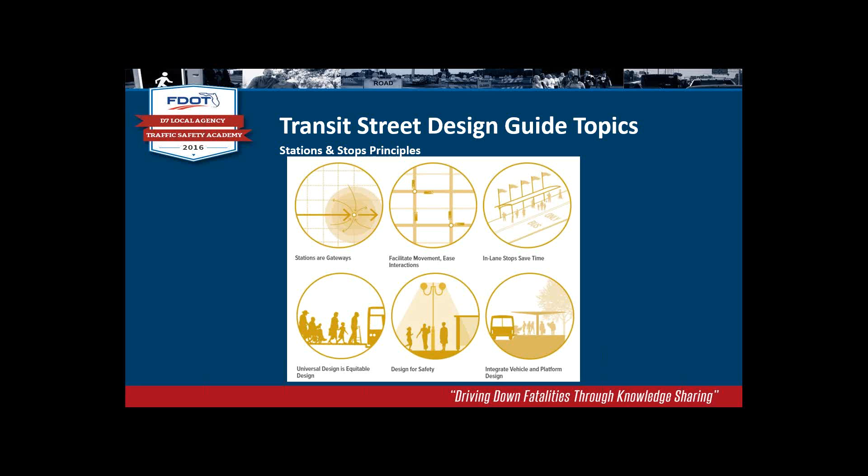They talk about station stops as really key. So being gateways, they're designed for safety. You want them universally designed, integrated vehicle and platform design. All of this stuff is beginning to drill down into some of the specifics and how to make them efficient and really an integrated part of the system.

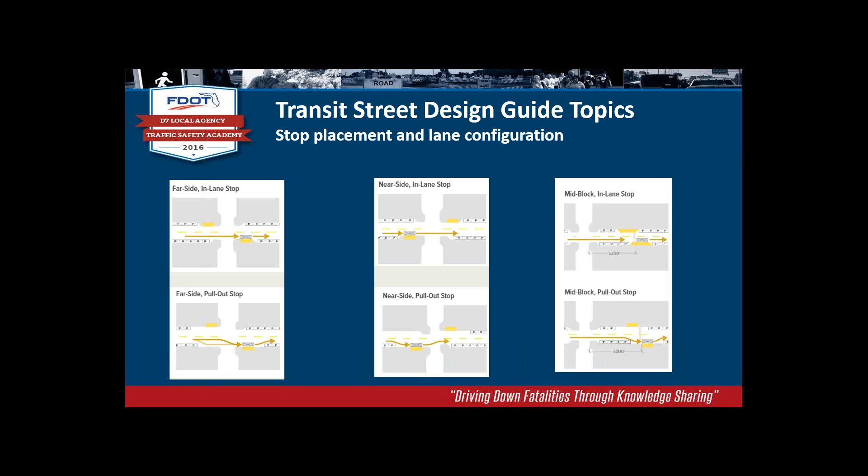There's discussion in the book about everything from where to place your stops, so the benefits, pros and cons of far side stops, near side, and also mid-block stops. They go into quite a bit about why you would want to do one or the other. Some of it may be circumstantial, you can't do others, but things to think about and benefits of each, and then how to put it together into an efficient system.

Universal design is increasingly important, and there are plenty of references to ADAAG and PROWAG in the book, so no worries about that. They talk about tactile cues and lighting being important, and color, as well as audible cues. So arriving, real-time arrival departure information for folks, and it's really about making sure that your system is accessible to everyone, regardless of age, ability, disability, 8 to 80. I mean, it's got to begin to be about it's good for everybody.

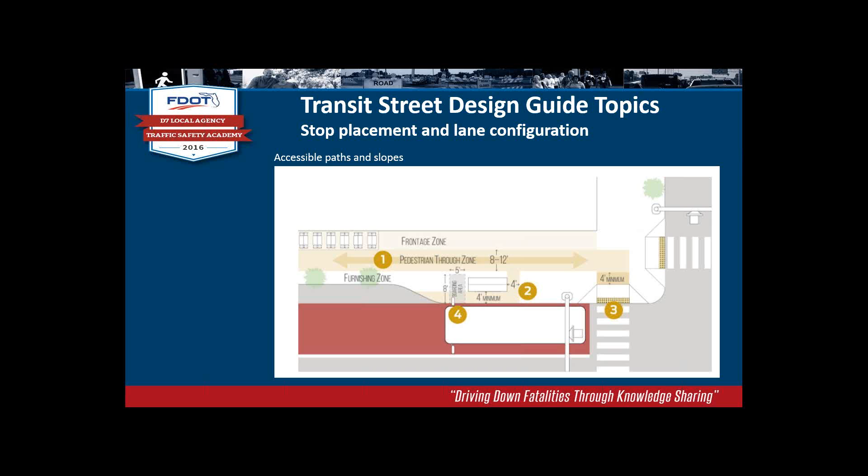They lay out things like accessible paths and slopes. Again, this is about universal design, but they do give measurements and things like that. So if you're looking for graphics that you want to use to explain or whatever, some of these graphics don't have the specific measurements, some do. Just worth taking a look through and understanding which graphics would work for you.

And then a stop configuration example. This is a shared cycle track stop, and things to think about. Number one is a detectable warning strip that protects pedestrians from walking into the cycle track. You've got accessible boarding area for wheelchairs. That cycle track being wide enough for maintenance equipment is something to think about.

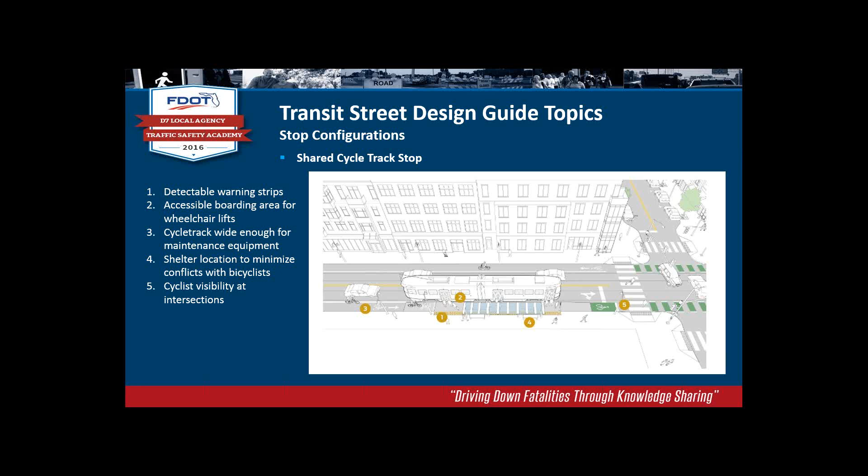Urban is typically 10 feet, I guess, and that facilitates that movement. 10 might be a little narrow, but consider when you design it that you design it wide enough for maintenance equipment. And then number 5 is visibility to intersections. Intersections are where everybody's vulnerable, and so putting cyclists in the right position in the roadway makes all the difference.

So they go into station and stop elements, everything from transit shelters, large and small, seating, fare vending, wayfinding, transit curbs, bus pads, green infrastructure, bike parking, and queue management. All of these things drill way down into the stop-specific level.

If you get these right, it moves out into the bigger picture, that holistic approach to transit design. In this case, we're going to talk about bike parking for a second.

So critical to bike parking placement is that clear zone, making sure everyone can move through the space without running into each other. If you've got multiple racks, you put them at 3 feet apart to allow access.

That recommended, while it's not critical, it's helpful, is within 50 feet of a stop. You don't want folks riding to a bus stop traveling too far to get there.

And then optional, long-term bike storage can make the difference for folks who want to use transit. Nothing worse than getting back to your bike after taking the bus, doing the right thing, something that feels good, and having it be gone. So consider long-term storage, especially if you've got folks on long-haul routes.

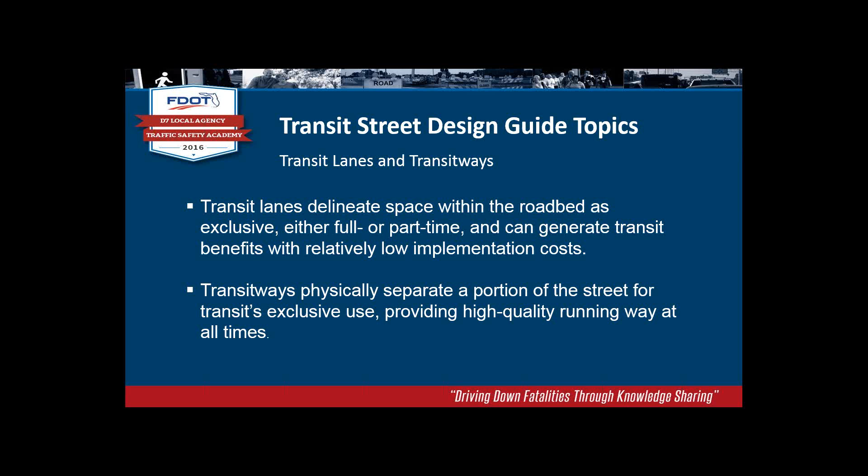Transit way is a little bit different. It's a physically separate portion of the street for exclusive use, and that is really about up-leveling your transit system, providing a much higher quality experience, reducing conflicts, and putting transit on a higher plane than your cars. And then with each of those, they go into some of the specific designs that could be used.

So for transit lanes, everything from offset to contraflow. Again, depending on what your road situation is, take a look through these for ideas, for details. Maybe there's things you hadn't considered, opportunities you might not have considered, and one of these is the answer to a challenge you've been having.

And then transit ways, there's really two options, that center and that side. So just again, another example.

That offset transit lane, that MUTCD marking is really important. You've got that bus only. You've got your bus traffic separated by a solid white line.

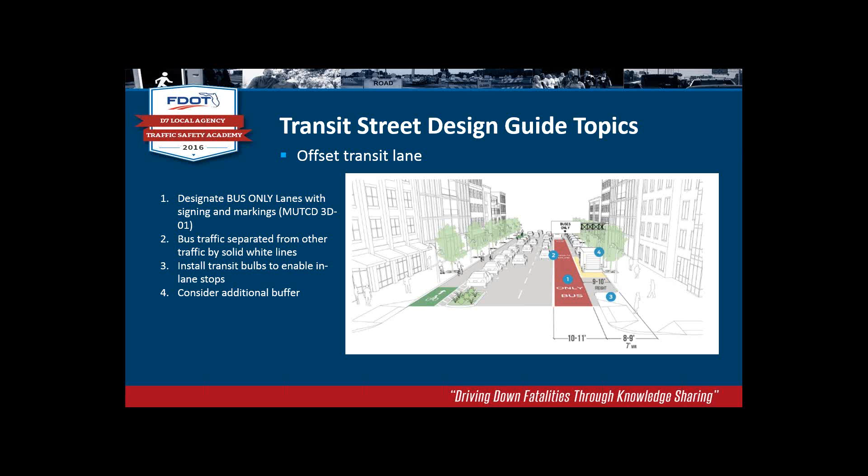Installing transit bulbs to enable in-lane stops. I talked about that a little bit ago. In-lane keeps them in traffic flow, they're not pulling in and out. And then additional buffers between the sidewalk if needed. But these are just things to think about if you're doing an offset transit lane on a one-way street.

And then another option, this is a transit way option, a center transit way. This is a little bit different, way more intense. You've got a dedicated transit lane. You've got median boarding island, so you've got to get folks to and from.

You're also marking your pavement for bus only, you've got signal timing. And then, of course, because all these guides work together, you've got pedestrian crossing, but let's refer to the street design guide to give you some more of those details. But again, there's measurements, some of those details.

You can begin to see how everything from, this is probably a 4-lane before, they allowed for transit and also added that bike facility. So this is one of those multimodal streets.

Additional points on this: center turn lanes, and then prohibiting turns and really managing those to make sure buses have the right of way. And then transit signal heads, again it's really about transit vehicle priority and minimizing confusion. You've got a lot going on the street, and those sorts of things really simplify the context, let folks know who's doing what, makes it really clear, takes away any of the guesswork.

They go into signals and operations, and a lot of the transit signal progression concepts, and then intersection design, everything from shared lanes to bike rail crossings.

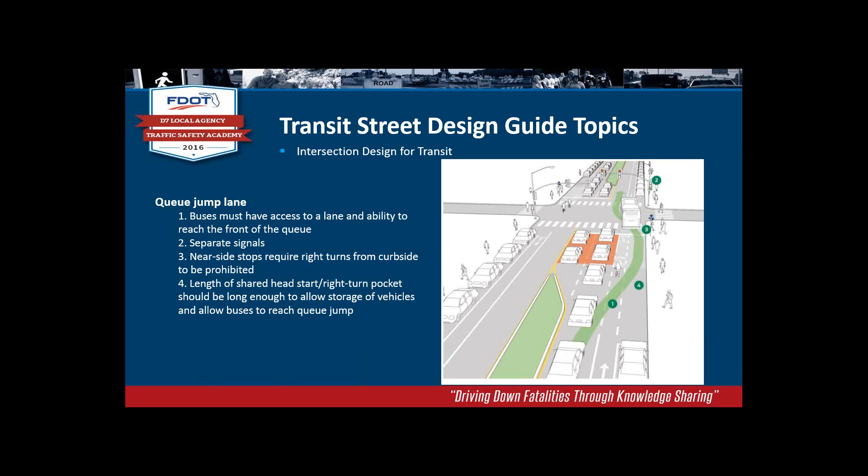So I mentioned the way they've done all of these is kind of big to little, micro to macro, or in reverse. These guys also spend time on network and system principles, this idea that it's a system. You cannot look at just one piece of it, it can't be just a route. So system-wide approaches go further.

You want your service to be frequent, predictable, and convenient, which leads to success. That ridership reinforces permanence. Equity is about folks getting to and from. Complete networks are important to making trips. You can't just have a north-south route, you've got to do the rest of the work. That may mean bike access to transit, pedestrian access to transit, that kind of thing. It's really thinking about the whole from your door to door.

And then easy to ride, easy to run. If it's not easy to ride, you're not going to get riders. If it's not easy to run, it's going to be a ton of work for your operating authority.

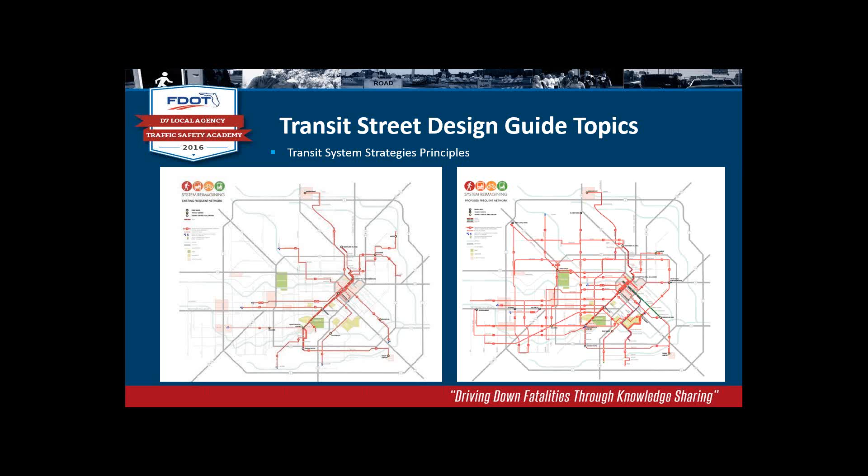This is another one of the strategies, so route simplification. Again, transit, while fascinating, is not my thing exactly, but it's pretty logical in the way they present their information. Turns present a huge problem for delay, and so the idea is reduce your turns, simplify your routes, reduce your delay.

Long routes should be designed to mitigate the cumulative impacts of delay, so delay adds up, and if you design your routes right, you get to minimize those. And then the idea that multiple routes converging means increased frequency without necessarily that single route being increased, and can give you the higher quality transit.

They also offer strategies at the station or stop level. Longer station spacing is more efficient. They talk about consolidating existing stops based on goals for the route, which is interesting. You've got local routes 800 feet apart, but if you've got a rapid line, a quarter to a half mile, so folks are more willing to walk if it's a regional route.

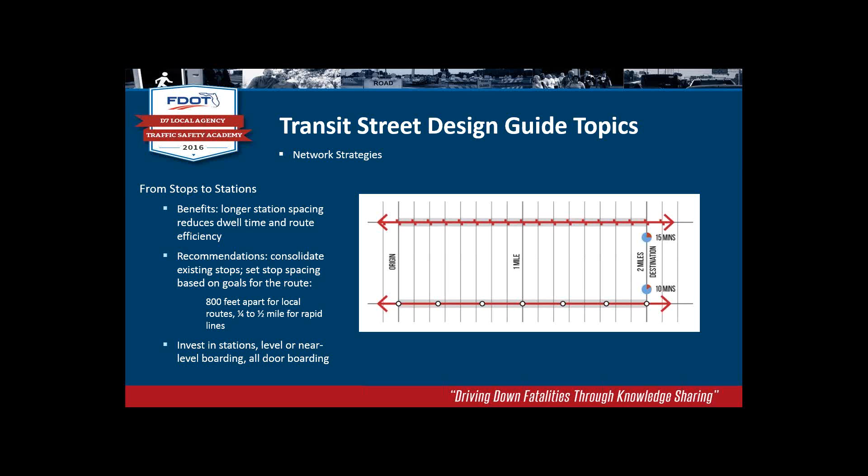And then of course investing in the stations, near or at level boarding, all door boarding - both, or I guess almost three things, make a big difference in your efficiency. And looking at those can make a big difference on a route level.

Again, performance measures are increasingly important for everybody. No surprise that NACTO talks about measuring the whole street. So it's not just about transit, we're not just moving buses, we're also counting people. We've got transit travel time. How accessible are things? What's our curbside management look like? How safe is it?

There are health, sustainability, and environment measurements we can apply. Economic productivity - so what do business sales look like, what kind of redevelopment are we having as a result of this. All of these things can help us measure the whole street and give us a much better picture of the urban environment and livability, which really gets to the crux of all of these guides: how do we make our urban streets perform better, live better, work better for all of us.

And that is everything I've got. So I don't know if there's questions.

There's a couple of questions in the chat. I just wanted to say, Jen, that was a lot of information. That was a really good overview, kind of introduction to topics. I'll definitely be looking at those guides and finding things. I love the application of some of these things in the urban environment. Yeah, very neat. Let's go through a couple of these.

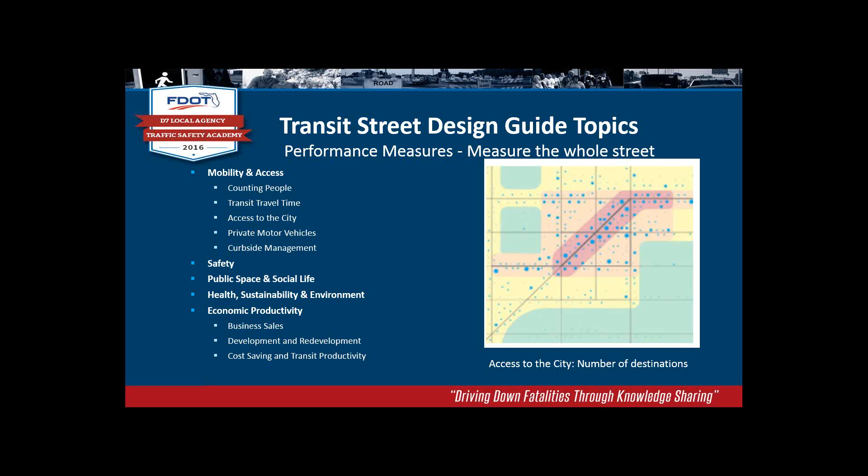Their downtown thoroughfare is 3 lanes in each direction. Let me see, the streets, downtown thoroughfare, 114-foot right-of-way. So they do a little bit with that. I don't know, some of our roads are more extreme than that even, so keep in mind there's a little bit of urban context.

I'm sorry, I don't know why that's not showing. Weird. So that's their thoroughfare before and their thoroughfare after.

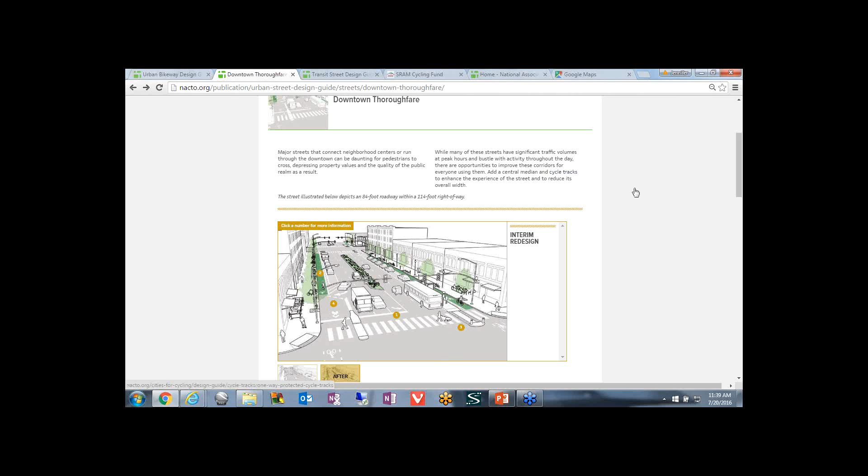Yeah, but these are definitely different aerials.

But that's one more question: do the guides reference before-and-after studies with statistics like changes in crashes, increase in transit ridership, bicycle use, etc.? They reference case studies done by cities, not that NACTO has gone out and studied necessarily, but this whole interim project and refining before—I think all the case studies would refer you to anything that's been done. So not NACTO itself, but a lot of the bike designs include a case study, and you could always follow up with the agency to see what's been done. Those agencies would probably be thrilled to share with you.